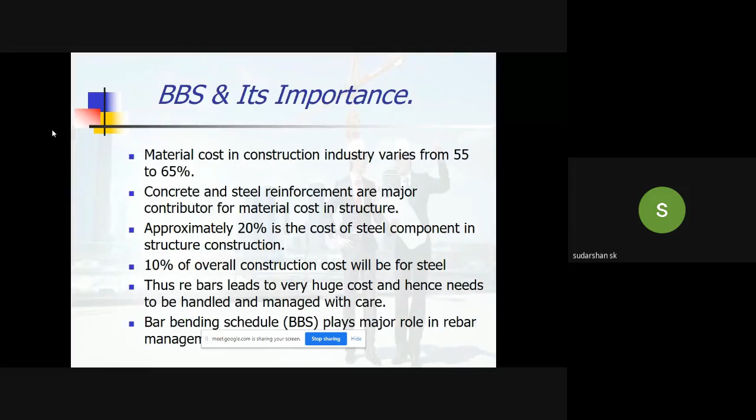Since there are a lot of chances of pilferage and misuse in projects, even a wrong BBS becomes a problem. If wrong scheduling is given to workers, they will cut the reinforcement in the wrong manner or not in the required length. When it enters the project, you will see the difference, and it will be rejected and go into scrap. If proper BBS is there, this will not happen. So BBS is a very important aspect to take care of in projects.

So let us understand why BBS is required. First thing is to make the PRW bills. When you enter the project at a smaller level, assignments will be given for QS engineers to make the PRW. What is PRW? PRW means piece rate worker.

This means how we manage labor in the projects. One method is to give them wages, per day some salary we have to pay. Another method of paying laborers is on the quantity basis. If they have done certain tons of work, we pay fixed rates. So every billing time, we should know how much steel or reinforcement work has been done by a contractor or PRW worker, and accordingly payment will be released. That is PRW, piece rate worker.

We give steel reinforcement work as a piece rate, so per ton the rates are given. So every billing time, you need to see how many tons of reinforcement work they have completed, and accordingly payment will be released. For that you need the BBS. Without the BBS, you cannot say how many tons of work is done.

Then, to give working details to the workers: how much length of reinforcement should be cut, how it should be bent, what shape it should take. Further, you are going to study those things. So those details will be given to the workers, and accordingly they will cut it.

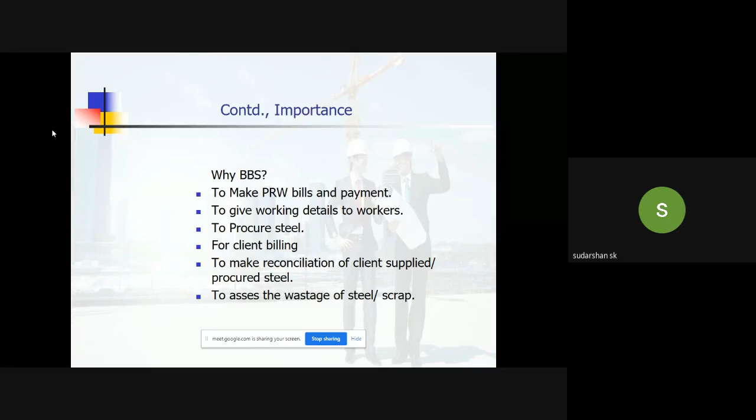The last but important point is to assess the wastage of steel or scrap. Steel reinforcement is a costly material - I have to manage it well, so that every small piece of steel, wherever possible, should be utilized. The steel scrap should be minimum. Many times, when we have a standard bar length of 12 meters, we need to put laps where required. These should also be recorded and registered to assess the wastage of steel.

This is also - hello, sir. Hello, excuse me sir, someone is sharing the screen. Divya ji, will you share? Yes sir, thank you sir - sir can you share your screen please? No, someone has shared their screen. You kindly share your screen. I will pin it - I am seeing the screen, no? You are seeing it. Audience, what about you? Yes sir, it is visible sir. Share it - yeah, now it is visible. Visible, no? Please proceed, okay.

So to assess the wastage of steel scrap, this is important. BBS is important. Let us start with the first standard weight of the rebar - it is the first step. You should know what is the standard weight of the rebar.

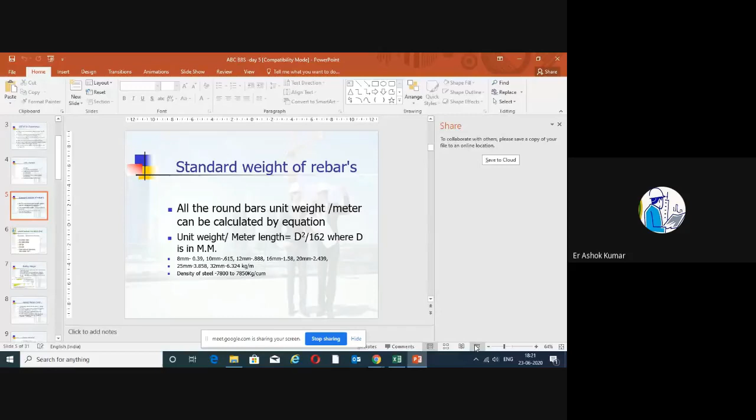See, the d square by 162, basically it is coming from the equations. You can try on your own. Try to get the d square by 162. It's quite easy. You should know the density of the steel. Already it's given here, 7,800 to 7,850. That is the density of the steel.

What you have to do is calculate the volume of a meter length of the reinforcement. The cross-sectional area, that is pi r square or pi d square by 4, into the length, around 1 meter - that's the unit length you consider. If you multiply it by the density, you will get the weight of the steel per meter. If you put d instead of diameter, putting any diameter, you put d only, then you get this equation.

You try on your own to get the d square by 162, so that you will remember it forever. D square by 162 you can remember for any round bars. By chance, if you are getting any other shape of bars, you should be able to know with the density to calculate the weight of the steel.

Suddenly, if you get a 12 mm square bar, how much weight per meter - you should not get stuck. What you have to do is just calculate the volume per meter, that is in terms of cubic meter. Then multiply it with 7,800 or 7,850. You will get the weight per meter.

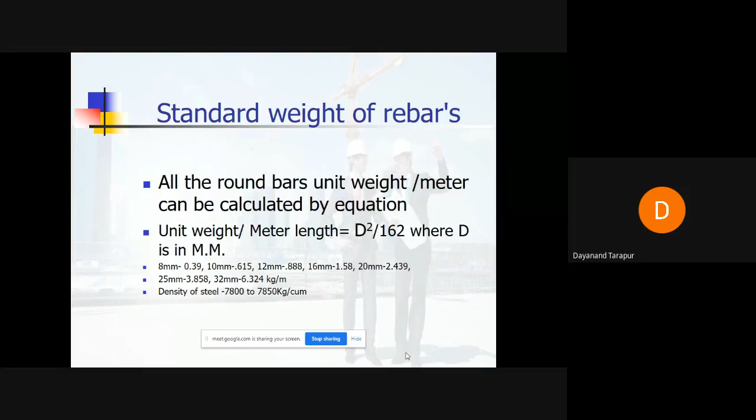So what are the codal specifications we are using for this - it is IS 2502, 1963. That will give you the detail of how the reinforcement shapes are. Further, we are going to see some slides also, where I am taking directly from IS 2502 showing you.

SP34 is the handbook for steel reinforcement. Go through SP34, it gives you very good knowledge about designs - even with examples they have given. So many graphs are there, many equations are there, so it's easy to design buildings. You need not calculate so much area and all that. Directly, if you calculate the moments, you will get directly the area of cross section and even the number of diameters for AST. What are the possible reinforcements also, it's given in SP34.

Utilize it. IS 456, I need not tell you people, because most of you students are conversant with IS 456. It's a basic code for any civil engineer. It gives both concrete as well as the reinforcement details. So then international standard, this is very important.

Nowadays, we are trying to compete with so many international level contributions, especially consultants. They are giving the drawings and detailing to outside the country. The Indian standards you cannot give for other countries. For that you should utilize the ISO standards. So ISO is the international standard.

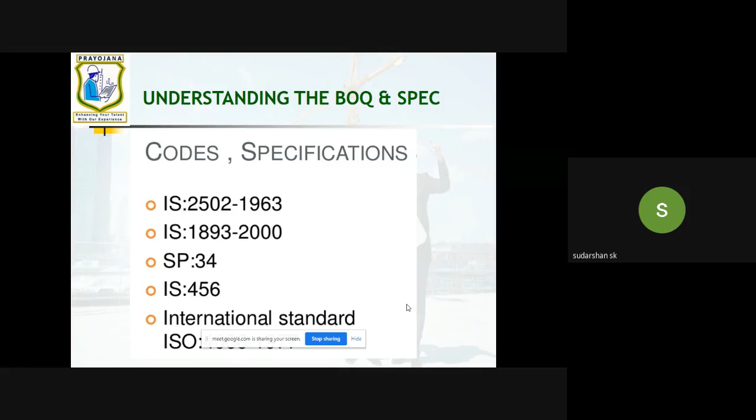Of course, not at your level. At senior levels, they will take this decision whether it will conform to IS or ISO, because many software companies, when you want to invite them to take space in your building, they will be looking at the ISO standards. If ISO standards are there, those foreign countries are very much interested, especially with HVAC, that is air conditioning systems and all that, because power consumption with ISO norms will be less. So nevertheless, even our buildings can be built to the international standard, not only to the national standard.

Okay, next is the rolling margin. What is rolling margin? In industry where the reinforcement is manufactured, the rebars are manufactured, that will be going through some orifice, and molten liquid steel is injected into that orifice where the diameter is 8mm, 10mm, 12mm, whatever diameters are there. Through that, this molten liquid is passed to get the required diameter.

See what happens with the course of time. That orifice or the diameter of the hole through which this molten steel is passed will get slightly increased. So the bar diameter, which is supposed to be exactly 8mm, for example, may give 8.1mm, 8.2mm, gradually increasing. In the beginning, they will keep the diameter slightly less than 8mm for a product meant to be 8mm, so whatever reinforcement comes out initially will have lesser diameter. But as time passes, as so much production happens, the diameter will keep increasing.

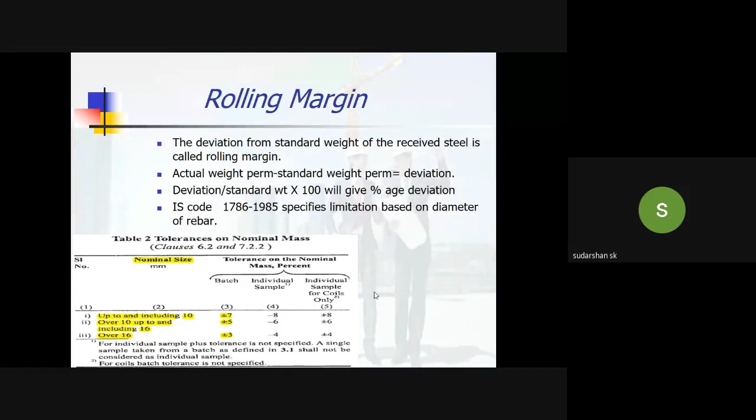Now, how do you calculate that rolling margin? Let us see this. Rolling margin: the plus sign indicates oversized materials, and the minus sign indicates undersized materials.

See, all site drawing measurements are done with lengths, because at the site, whatever you are measuring, that's the length. Every time you cannot weigh and put it. No, you will be measuring in terms of length, maybe in the slab reinforcement or maybe the column steel. All those things will be measured in length, and finally we will be converting into weight.

If you convert into standard weight, that will differ from the actual weight. That's why you should maintain the rolling margin. If the rolling margins are not maintained properly, steel reconciliation may not be easy, or it may not even be possible.

What is the importance of checking that? Just here is one small calculation I have done. If you consider 100 metric tons of 10 mm is received with plus 7%.

Plus 7 is the oversized material, meaning the diameter is more than 10 mm. So the actual length received will be less. With the standard, it's supposed to be 1,62,601 meters as per the standard weight, whereas with a plus 7% rolling margin, the actual received length will be 1,51,964 meters. That means there will be a shortage of 10,637 meters.

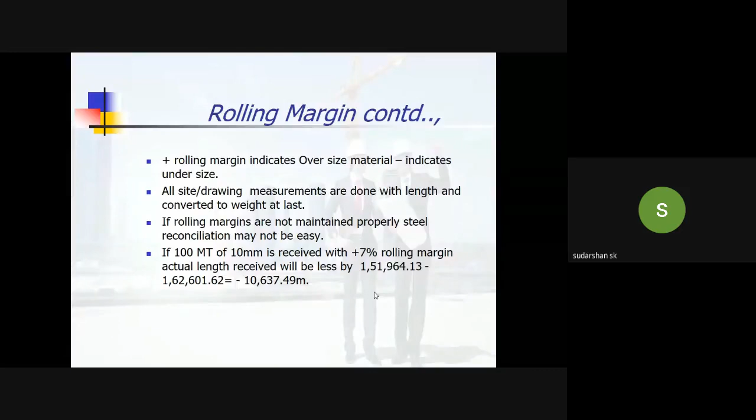Let us see the next topic. We are going to see about the cover. Basic things what I am discussing, later on when you are doing the BBS, you need all these things. Footings need 75 mm cover.

Of course, situation to situation, further we are seeing IS specifications also. Raft foundations need 50 mm cover at the top, even at the bottom sometimes they will give 50 mm cover, then sides definitely they will get 75 mm cover. At the bottom we are putting the PCC and over that PCC you are putting the reinforcement, that's why 50 mm cover is accepted at the bottom. But it depends, consultants will decide how much should be the cover based on weather condition, soil condition. So many things are there to decide the cover.

In the coastal regions, the covers will be different. In Bangalore, the covers will be different. In earthquake zones, something different like that. Various zones will have various cover parameters to be decided.

You have to see, whenever you are preparing the BBS, they will be giving a note on what cover is to be followed. That cover only you have to take into the BBS. Simply you cannot go by a standard value. You have to check, and if it's not available, then you can inform the consultant. This is the cover I am going to adopt in my project.

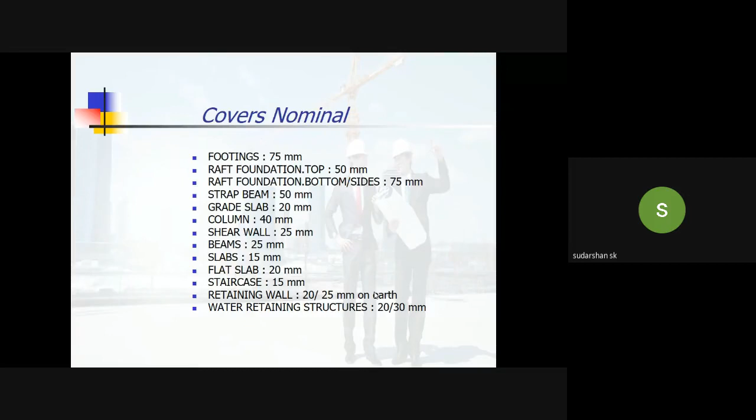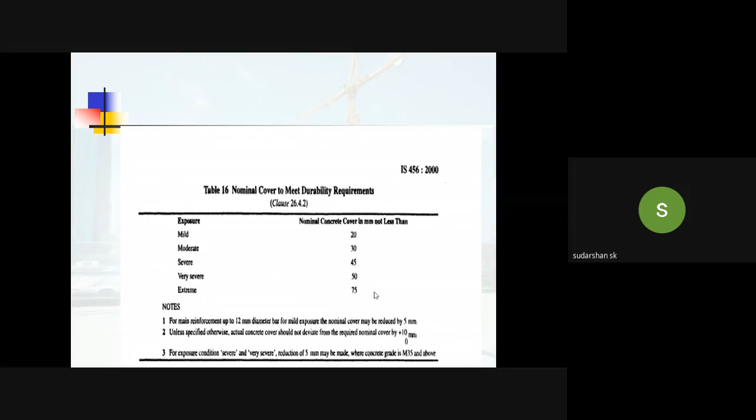What are the main factors in the bar bending schedule? See the member identification, bar mark, type of steel. Type of steel means what grade of steel, that should also be maintained. Generally in projects, in order to avoid confusion, we go ahead with the same grade of steel. Many times there will be confusion if you are getting two grades of steel, confusion at the site. The workers are unskilled, or the stocks are not maintained properly, and if they get exchanged, problems will come. So in order to avoid that, generally we go with a similar grade of steel for the entire project.

Sometimes what we'll do is adopt a certain diameter and grade of steel, maybe Fe 415 or Fe 500. Generally for 8mm steel we can go with Fe 415 because we give the minimum steel requirement there.

But it's better to practice the same grade of steel for the entire project. Nowadays the rate difference between Fe 415 and Fe 500 is not much, and Fe 415 is almost getting outdated. So in every project we will use Fe 500 or Fe 500D. That is the steel we are going to use in the project. However, I have to mention what is the grade of the steel.

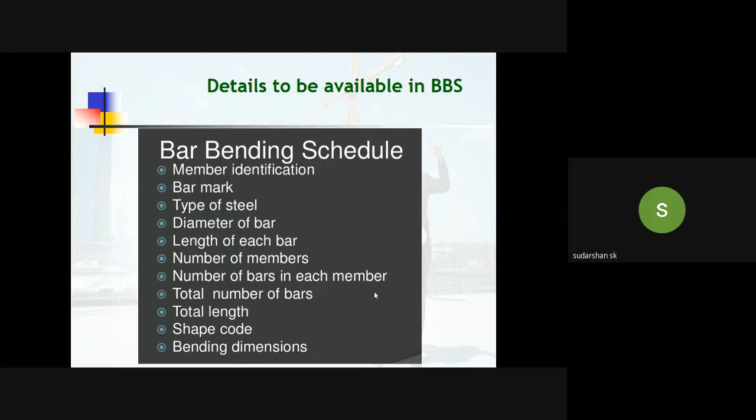Then you have to mention the diameter of the bar, and you should know the length of each bar. Only then will you be able to calculate the weight of the steel. Then the number of members - if similar beams or columns are there in multiples, you have to mention number of members, then number of bars in each member, maybe rings - so many rings are there, like that it will come. Then total number of bars, of course those multiplications will give you that. Total length, shape code, bending dimensions - all these things need to be incorporated in the bar bending schedule. These are very important things you have to incorporate in the BBS.

How you will calculate, that's mentioned here: nominal cover plus diameter of the ring plus diameter of bar divided by 2 - that will give the effective cover. If they have given effective cover, you should work back to find the nominal cover, since nominal cover is important for our calculation. So if effective cover is given, you have to work back the nominal cover. Effective cover is the reinforcement center. A small calculation is given here.

Let's check how we will calculate the effective cover for a given 20mm diameter bar. It's a simple calculation.

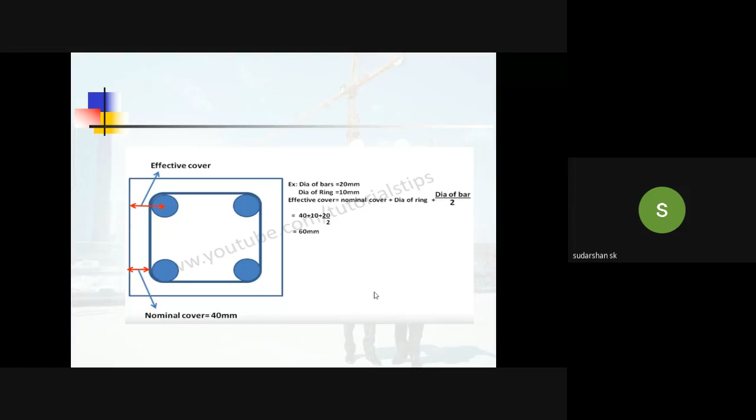Let us see what the code says - IS 2502. See this. I have captured only 2 here. If you see the code, you'll get many shapes of bars and what is the length.

That is the shape of the ring. Here you can see 2 times (A plus E) plus 24 times diameter. Important thing you have to notice is A is the internal length of the ring.

Generally we'll see this mistake - they will be taking the outermost size, meaning whatever the column size is minus nominal cover. If you do that, you will not get A. Again, the diameter of the ring also you have to reduce, only then will you get A.

You can see here A is the internal dimension of the ring. How you will get it? Column size minus nominal cover minus the diameter of the ring. You will get the internal dimension E. So both sides, 2 covers minus 2 diameter of the bars of the ring, you will get E. Similarly you will get A - the length of the column minus both side covers minus 2 times diameter of the bar, then you will get internal dimension as A.

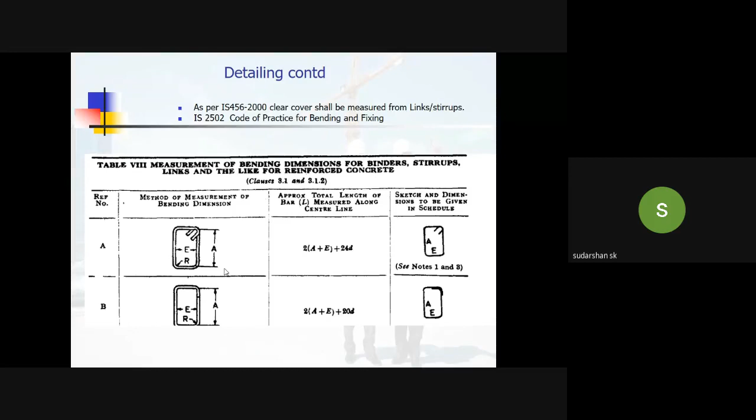Generally we will not adopt this type of system in our current practices, because nowadays we are using higher grade reinforcement where bending and rebending is not allowed. This 45-degree bend or this type of hook is not allowed, and it's not required either.

Earlier days we used to get mild steel reinforcement. Mild steel reinforcement is a little elastic material, so you could bend it to that shape. Here, if you start bending to the shape, the stresses and strains will be so high.

So micro cracks will develop at certain bends. Even though it may not be visible to the eyesight, certain cracks will develop here and here also. That's why nowadays we are not adopting this type of bending system at all.

We'll be studying what type of bending system we are using in current practice. Most probably we will not adopt this cranking system, maybe in some lintels or somewhere we may use it. Definitely this hook is outdated.

Because of the ribs you must have seen on the reinforcement, it has got a lot of bond strength. Even mild steel earlier didn't have ribs, so the bonding was less in the concrete. That's why we used to give hooks in earlier days, but now it's not required.

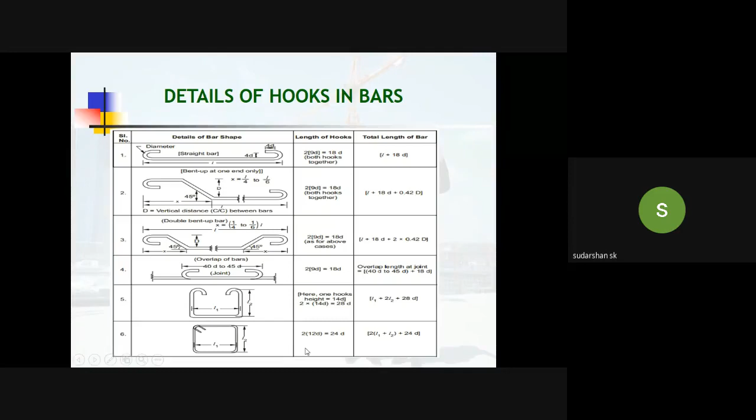One bend here, another bend here - meaning total if 90-degree bends are there, it will be 5. Now if we consider this 135-degree bend, 3 will be with 90-degree bend and 2 will be with 135-degree bend. So how much reduction will be there for the 12 mm diameter?

3 times the diameter, 3 into 2, that is 6 times the diameter, that is 7.2 centimeters - 12 mm into 6 times gives 7.2 centimeters length. And another 135-degree bend of 2 means that is again another 6, 3 plus 3, 2 times 135-degree bends are there.

So total, how many diameters are we reducing? Earlier 3 into 2 is 6, plus 6 more, so total 12 times diameter - 12 mm into 12. That is the length reduction. That much length reduction we should make in the total calculation.

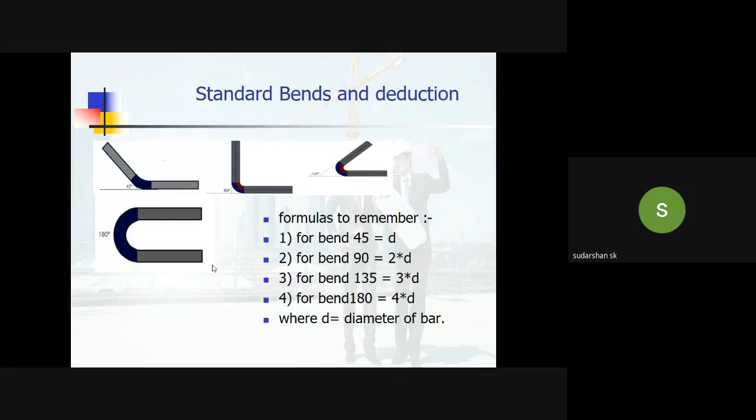So it has a huge impact on the BBS, that's why I'm detailing this part. Remember, 45-degree bend means 1D, 1 diameter reduction - keep that in your mind. These are the various other details given in IS 2502.

As I told, we are not practicing this type of bend. However, you should know on the right side corner, you can see this 45-degree bend. Maybe in your examination, they may give you BBS with bends, so a 45-degree bend is there.

It means here also the length will be increased. Two bends are there, no? Here 45-degree bend, here one more 45-degree bend. Two 45-degree bends, you have to increase the length.

At the same time, the diagonal length will be more than the straight length. How much it will be more? You can do the calculation with 45-degree means it's the isosceles triangle. Two sides are equal, so it will be 0.41 times the horizontal length.

What you will get extra? 0.41 times if you multiply the straight length, that much length increase will be there for the cranking bar or the inclined bar with the 45-degree bend.

That portion you can do on your own and check up. What you remember is you have to increase the horizontal length of this portion and add 0.41 times the horizontal length for this stretch. That will give you the increased length for the inclined portion.

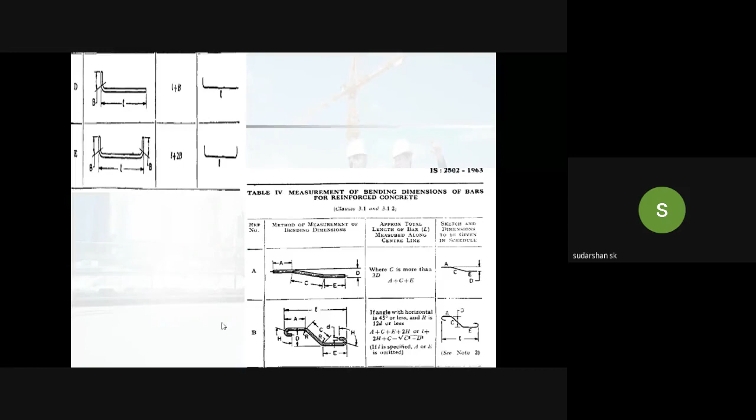Let us see a standard BBS format. Two formats are there, one is given by Prayojana, that also we'll be seeing here. Almost all the requirements. Understand this table is very important for the students.

Many times if the proper table is given, we will give the marks. Whenever we ask to draw the BBS, at least if the table is there, indicating all these bar numbers, you have to identify the bar numbers, mention them in the drawings and here, so that you can correlate which bar you are taking in this calculation. So bar number is important. Bar shape, what is the shape of the bar, you should mention.

Further we are studying. Then what are the dimensions, like A and B, horizontal length B, and here vertical dimension is A. All those things you have to mention here, that is shape of the bar. That's very important, these are the breakups what you are doing. Then diameter of the steel is very important, you have to mention here.

Then spacing to get the numbers. What are the numbers to get? You should mention the spacings. Then cutting length, how we are going to calculate the cutting length? We will be studying in the further slides.

Okay, then this last is varying from 8 mm to 32 mm diameter. You people, sir, you should know Excel better. Excel is very important to do any QS. I think all these 4 days who have attended, they are aware of the QS requirements.

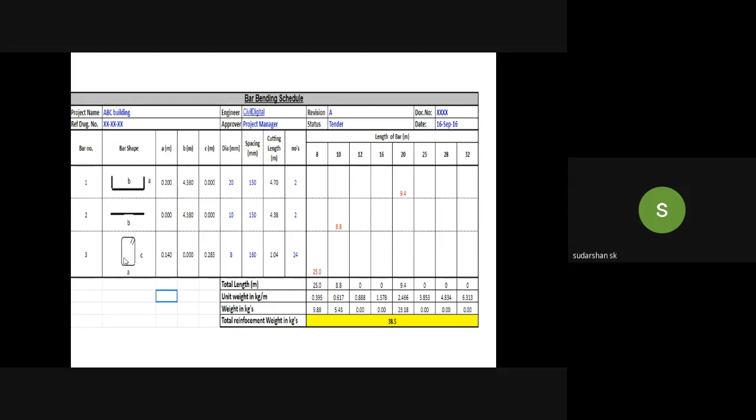Next slide. See, this is the format given by our Prayojana Consultancy.

You have to go into the technologies. Date is very important. Then who has done this calculation should be written here, and checked by - this is very important. If any mistakes are there, you can ask, if you find any difficulties, the person who has done it. Otherwise generally some escape will be there - 'I have not done this, sir' - that's what generally will get as comments. Instead of that, you mention who has done the calculation, that should be written here. Somebody must have checked it too. Many times errors happen in civil engineering works, and when they are sitting for the last audit or somewhere, they will get into a lot of problems. So at that time, if these things are there, that will be very useful.

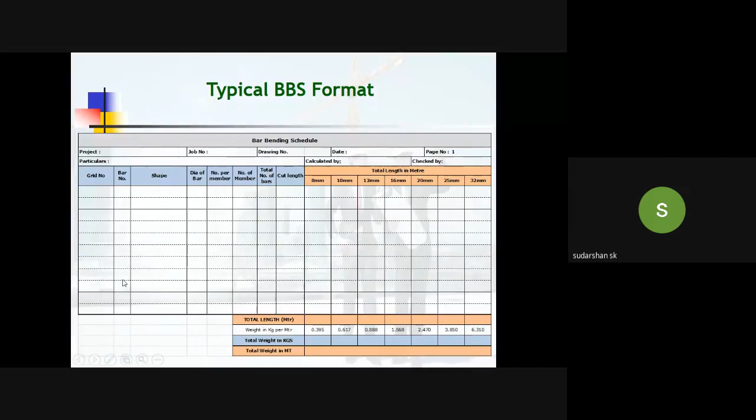So the standard weights are given here, 0.395 and 6.31. Generally, we do this only at the project's reconciliation time. We get into the rolling margins and go ahead. Otherwise, generally we multiply with the standard weights and release the tonnage to the contractor, as well as for claiming the bills.

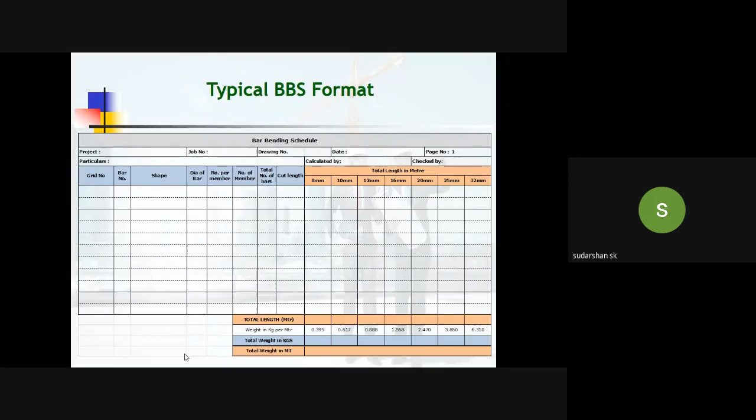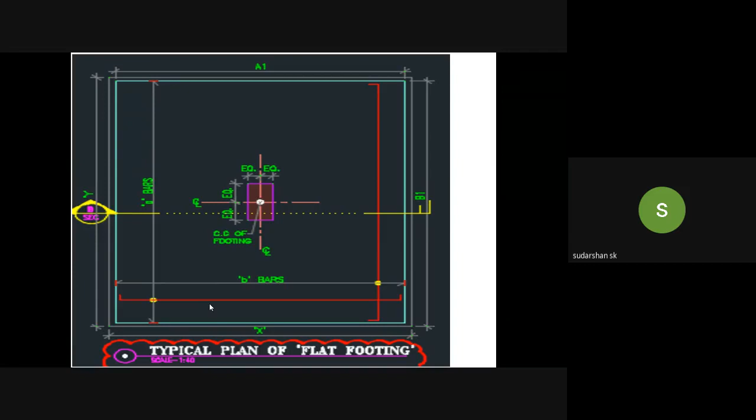3500 is the length, minus 2 covers, you will get the length of the bar, that is 3350 mm.

Add 2 verticals as shown in the drawings, both sides 150 mm each, so 300 mm total. Total length of the bar is 3350 plus 300 mm.

You have to give the shape of the bar also, as seen in the footing sections. Then 3350 plus 300 mm is the total length of the bar, that is 3650 mm. You can deduct 2 bends here.

See here, the shape of the bar means in the BBS you have to mention this shape. One 90-degree bend is there, another 90-degree bend is there. You can do the deduction, but generally we will not go for it. If you deduct also, there is no issue.

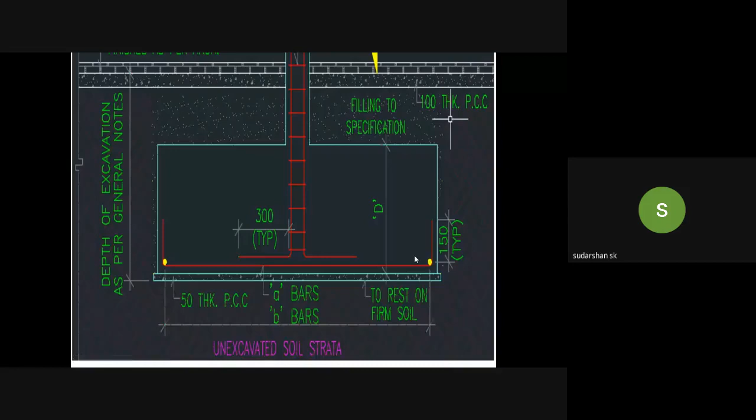Unlike the vertical rings, where you get a lot of multiples, here for the 90-degree bend you can officially do the minus also in the calculation. Then how will you get the numbers?

Numbers equal to another direction, whatever the length is there. Again 2700 is another direction length, minus 2 times cover, taking 75, and spacing is given as 100 mm. So then you will get 25.5 numbers out of that calculation.

So always add plus 1 number, because both ends we are giving the reinforcement. You cannot just start in between. So you draw the particular drawing and see how many spacings, meaning how many bars, you will get.

Always add 1 plus 1 number so you get the total numbers. So after getting 27 numbers, you have to calculate the number of spacings and divide again, because you have rounded off 25.5 to 26, then added 1 number to make 27.

So how many spacings you will get, you divide it again, so it will be a little less than the 100 mm spacing, maybe 99.7 or 99.8. That should be marked and placed in equal spacing.

This 27 numbers should be placed equally. Otherwise, if you start keeping 100 mm only, at the end you will get very less spacing, maybe 80 mm or something. That should be equally distributed, meaning the mat should be adjusted properly.

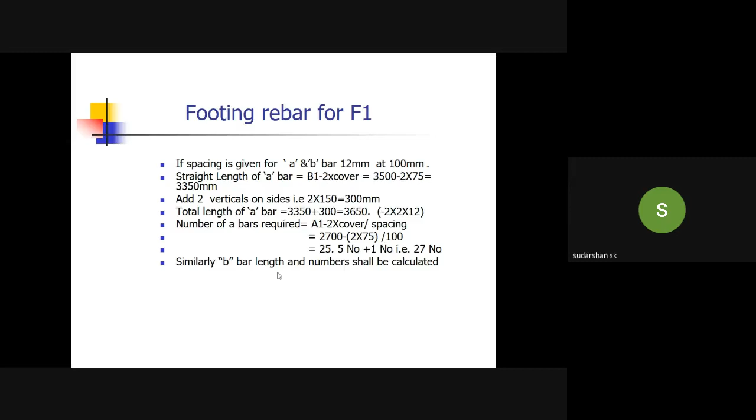Other than that, you can see I have done the simple footing without the top mat, and here another footing with the top mat. When you give the top mat, when the footing depth is more than 1 meter, you are going to have the top mat also.

Generally it will be nominal steel, unless it's designed particularly with various steel. If the compression zone also needs steel, you get main steel also; otherwise generally it is nominal steel, also called shrinkage steel. If the footing depth is more than 1 meter, we will be providing this top reinforcement. Keep that in mind.

Similar to what you calculated for the bottom bar, you calculate the top bar also, and perpendicular to that direction also you get the reinforcement. Both directions you will be providing the steel.

Since you are beginners, there are a lot of combined footings, lift pits, and even rafts, everything goes into foundations. As you grow further in the technical field, you will come across such things. If you know the fundamentals, you can calculate that also, no issue.

This is a typical footing with the top mat. In projects you will have this type of top reinforcement also.

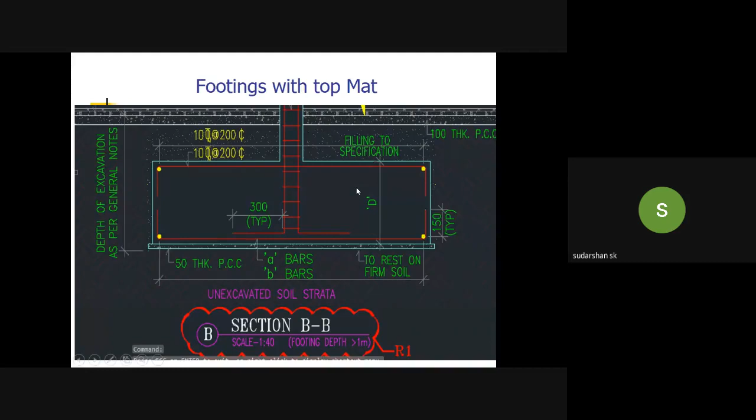Next, we will study the lap lengths. See here, consultant what they have given, LD plus 10D. LD is the lap length or development length what we are going to have. Plus 10D, consultant wants to give a little margin for himself. He doesn't want to see any sacrifice because if LD calculation has some reduction, they don't want to face any problem. Up to 10D, they can keep the margin.

This is just to avoid the mistakes happening. Otherwise, what happens? You have to replace the total reinforcement. If some LD calculation has problems, any shortage in length means you have to replace the reinforcement. In order to avoid that, the consultant has added plus 10D extra as a safety margin.

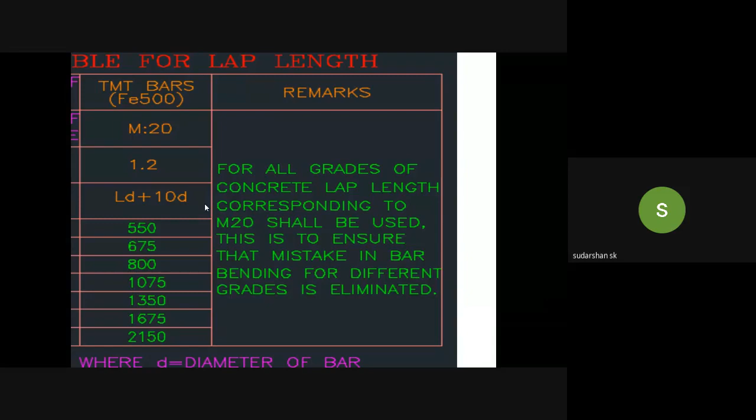You can see this particular development length given in the code books. Earlier days we used to get some 50, 70, 45D like that only.

What observation can we make out of this table? For Y, you have to think that it's indicated for the FE415 grade. What are FE415 grade and FE500? We'll discuss after these two slides. Fe415 steel with M20, M25, M30, M35 - these are the grades of concrete. These are the diameters of the bar, and this table will give you the development length in tension. Whereas on the right side, you can see the development length in compression.

What are the observations we can make here? If you consider 16 mm diameter, for M20, the development length is 775 mm. Whereas if it comes to M40, it is 475 mm, almost near to half. As the grade of the concrete increases, the development length reduces. Keep that in mind.

Many times in orals also they may ask you why. As the grade of the concrete increases, the development length will reduce - you should remember that. For M20, M25, M35, gradually as the grade increases - 1175 to 750 mm for 25 mm. If you check, 1175 mm reduces to 1025, then 950 mm, then 850 mm, then 750 mm. There will be a reduction in the development length as the grade of concrete increases.

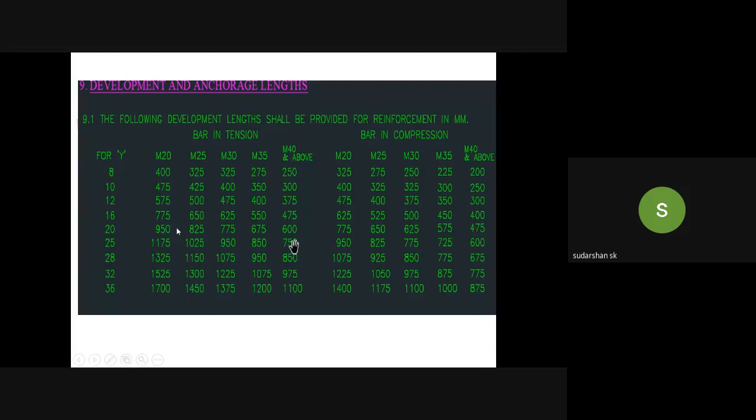See, same 20 mm diameter. When you are using FE 415 grade, indicated by Y, the development length is 950 mm. Same 20 mm diameter, when you are using FE 500, the length is increased to 1150 mm. This means as the grade of the steel increases, the development length will increase.

The four things you have to note. One, as the grade of the concrete increases, the development length reduces. You can see that same thing, 1150 to 725, there is a reduction there. And as the grade of the reinforcement increases, the development length also increases. Keep these two things in mind. In the compression zone, the development length is less. In the tension zone, the development length is more.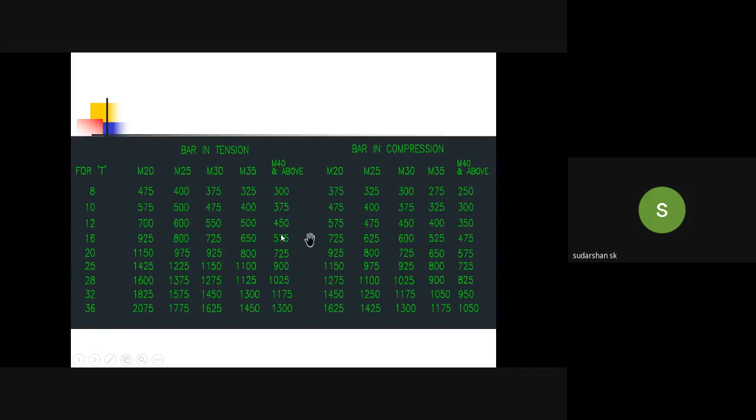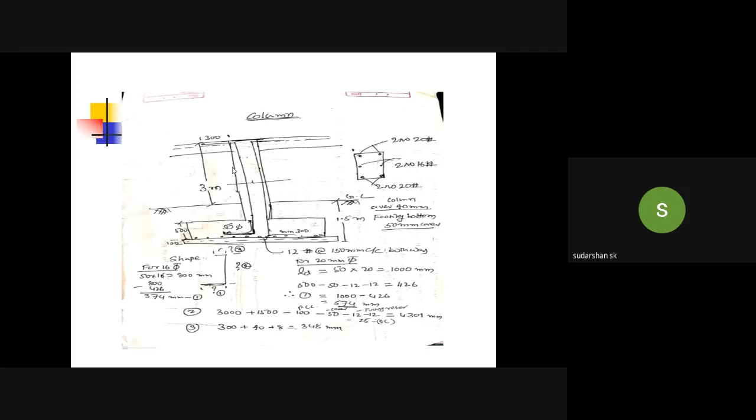If suppose such columns are 10 numbers, you have to mention the number of columns, then number of members, 4 numbers, then multiply by so many columns. That will go into the table. In the table, you have to fill up all this, indicate the shape of the bar and give individual dimensions, so that you can get the total length of the bar. Multiply by numbers, you will get the final total length. With these details, you can fill up that format.

Let us understand, another 15 minutes time is there for us.

The beam reinforcement detailing. As I told you, in FE 415 and FE 500, the cranking of the bars is not done nowadays. If you go to any project, they won't do the cranking. Cranking means a 45-degree bend. Actually that is an economic thing. What we are doing is, it resists the shear as well as the reinforcement taken from the compression zone or tension zone. We are curtailing the reinforcement in the compression zone and taking it to the tension zone. The cranking method is actually economical compared to this system.

However, since the grade of steel is increasing, the codal practice is not allowing that reinforcement to be bent into a 45-degree bend, because it requires reversal of bending. At that time, micro cracks are observed in the bending portion, so that's why it is restricted or not done. So cranking should be avoided in FE 500 grade especially. If you are using FE 415, we can allow it in slab reinforcement, lower diameter reinforcement you can allow. But definitely it should not be used in beams.

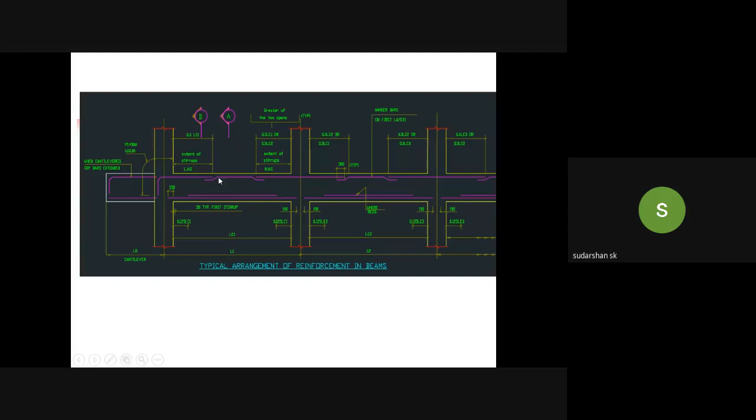Again, one more figure. I am giving a typical beam with 3 meter and 4 meter span. Purposely I have taken this side as a 4 meter span, because you remember 0.3 times LC1 and LC2, whichever is greater. Now we'll see how the calculations are made.

See bar 1, you can see here. This is bar 1. This is the first, bottommost layer of steel what we are going to keep. What is the length? Length is nothing but the 3 meter clear span plus 0.15 bearing, plus 0.15 bearing. You have seen that already in typical details. That is 150 mm. 3000 mm plus 150 mm plus 150 mm, that is 3300 mm will be the length of this bar.

So in the BBS format, you should mention the shape of the bar as a straight line. Then you have to mention length as 3.3. Then numbers, 2 numbers; if similar beams are there, you mention the similar number of beams. That way you can get the total length. The diameter of the bar is 20 mm. This is item number 1, that is the bottommost bar.

Then the next bar is bar 2. Bar 2 is the second layer reinforcement, what we can see here. What is the deduction for curtailment? This reinforcement is curtailed, this is second layer curtailment. How much is the curtailment? It is 0.125 times L1 or LC1. Here 3 meter is the LC1. You can see here, 3000 the clear span minus 0.125 into 3000, that's nothing but 3000 minus 375, minus 375. So the total length you are going to get is 2250. So length of the bar is 2250 mm. This is bar number 2 detailing, whatever the length is.

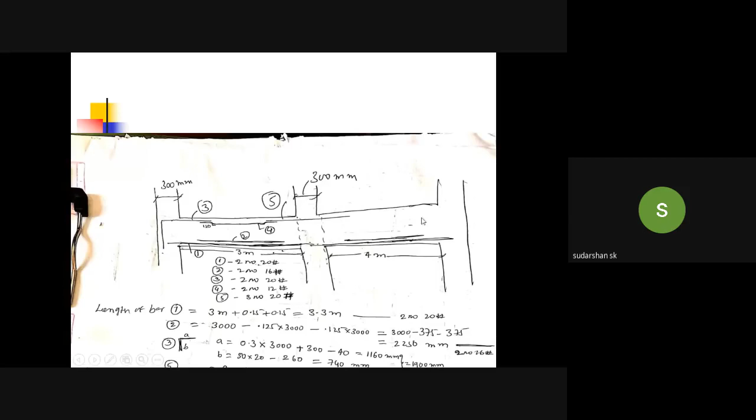This is bar number 3. Next, I didn't go for bar number 4. I went to bar number 5 because of the question, but anyway, I will explain it.

See, bar number 5, as I explained, whichever is LC1 or LC2, whichever is greater. Now we can see 3 meter is the clear span for this and 4 meter is the clear span for this portion. So which is greater? 4 meter is greater. So you take LC1 or LC2, whichever is greater, that is 0.3 times the 4 meter. And this side also it is 0.3 times the 4 meter. So 0.3 into 4 plus the other side also 0.3 into 4 meters, or 4000 mm, plus whatever the column width is there, 300 mm.

Both sides concrete is there, so no cover is deducted. Whereas if you come to the end bar, you deduct the cover, but here it's inside the concrete, so there's no question of cover. So plus 300 I have taken as the column width. It will be 1.2 meter on one side, another side also 1.2 meters. Then add the column width, that is 300 mm. So total length will be 2.7 meters.

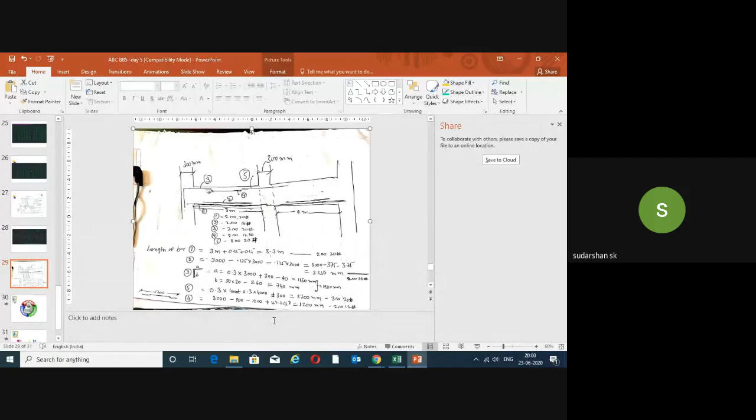So that will make things very clear. BBS is a very important and interesting subject, and you don't need very high scientific calculators or anything required like this. You just need simple calculators or a good Excel sheet to give you these variables. Right now I am coming to the end of this presentation.